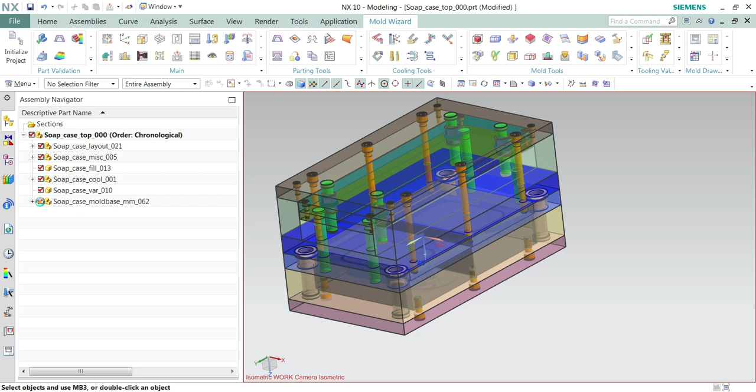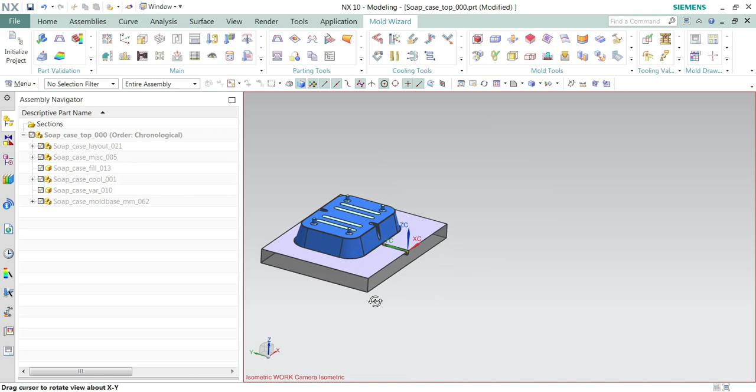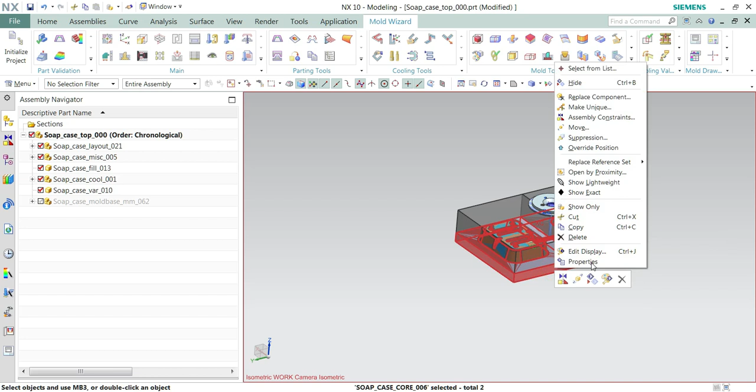We'll start with extracting the runner in the core. I chose a pocket and extracted it with the tool called pocket. So here we made one cavity, one core, and the same will be projected in another core. I'll hide and show - I extracted in a single core, so the same is projected in another core.

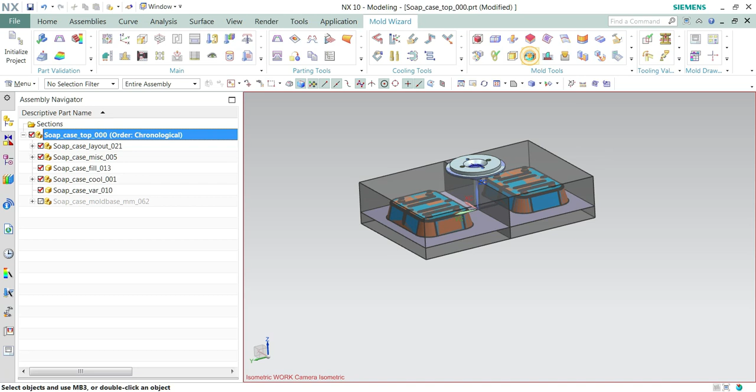The same way for the gate also, gate and runner both are selected, and now I'm going to merge my workpiece to the main core and cavity plate. For this, there is a tool called merge cavities.

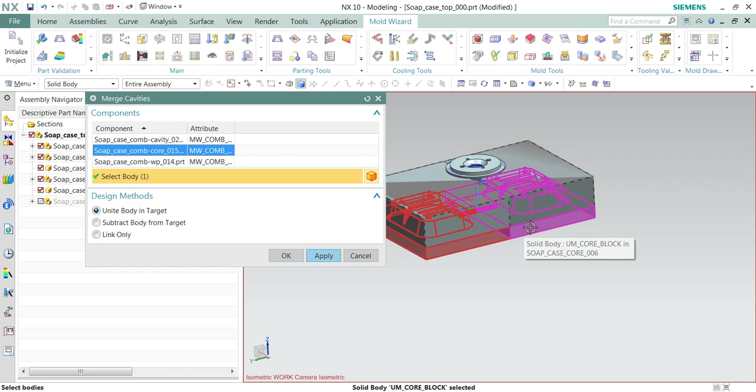There it is shown cavity comb. Comb means merging of both the workpieces - it's a component name called comb. So cavity comb I made by selecting both the workpieces of cavity, and also I'm making a core.

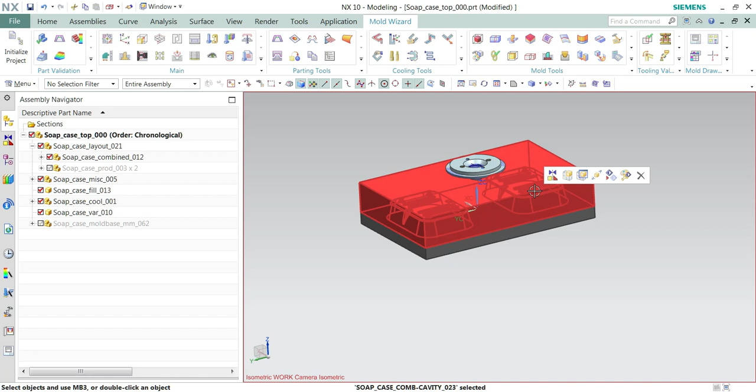Here I'm not making a workpiece, so it won't be selected. This combined component will be there in two assembly files, and the top one will be considered as our final workpiece, while the one below will not be considered, so I'll hide both of them.

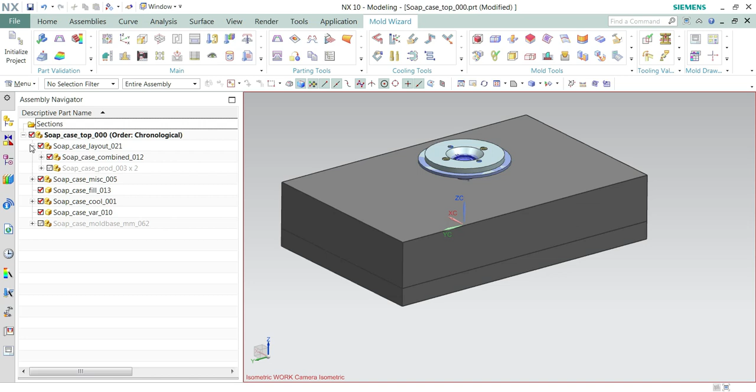For hiding, just select the assembly file and go to the reference set and make it empty, so that it will not be shown in the next process.

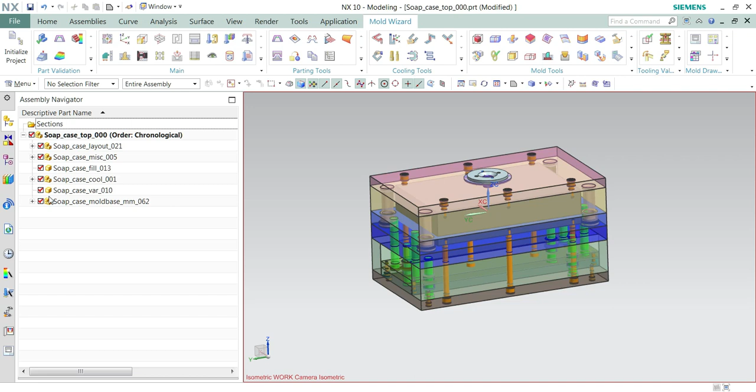Now the important point is merging our cavity and core to the main assembly of the mold. I am going to merge both into one, and for this I will be using the same pocket tool.

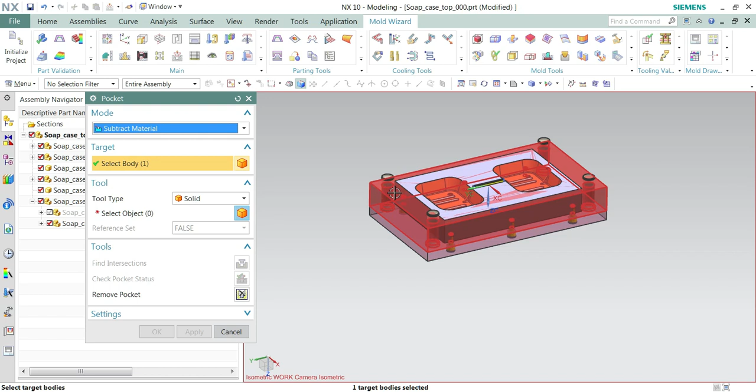Now I will be hiding unwanted plates. In both tools I am going to merge - I'll choose select pocket again. First I will subtract, later I add material to the same, so now I am subtracting.

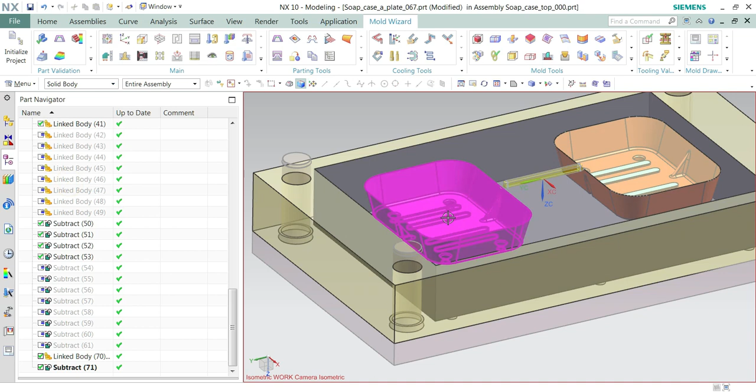After subtracting, the inside pocket will remain, so there will be two bodies remaining. For the two of them, I will manually delete it. I'll filter a solid body, select both bodies and manually delete it.

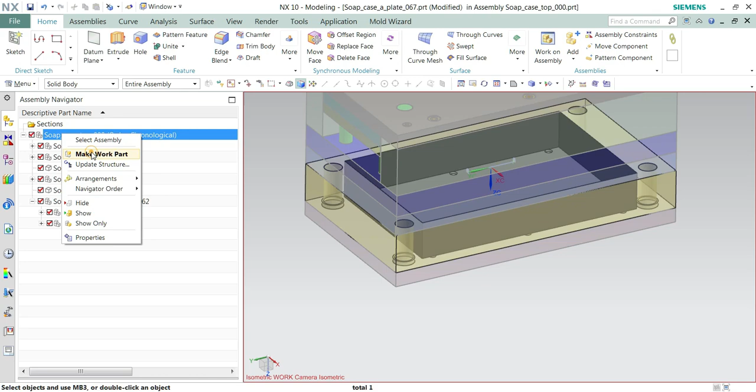This is some residue, and it has to be deleted before merging. Now I'm going for a pocket option to merge both. I'm selecting add material, the same way targeting the plate and tool.

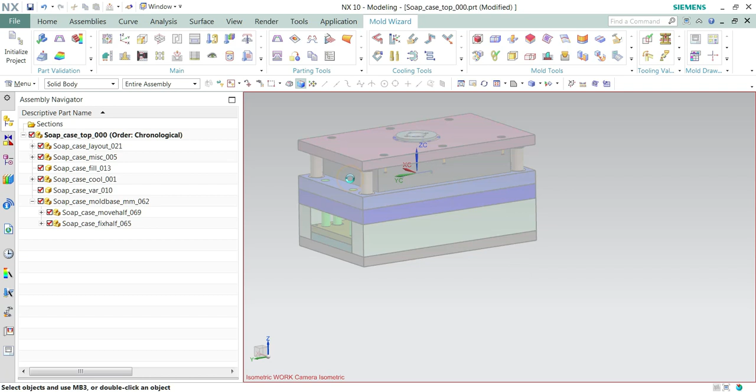As you can see, my cavity has become solid now.

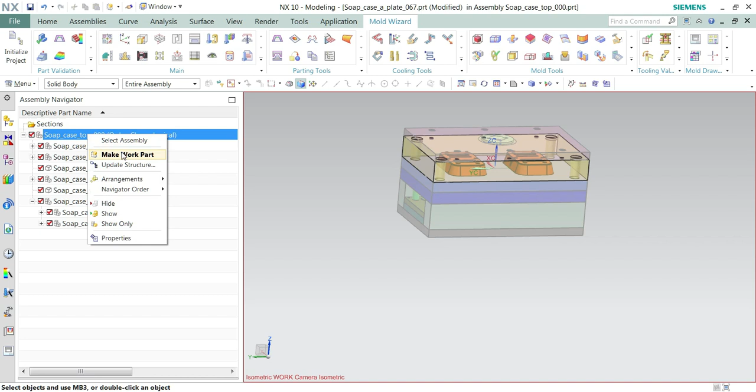For this mold, I'm not using the insert type - I'll be making a solid type whole plate. In an upcoming video, I'll show the insert type too. Since this is a very simple component, I'm not using an insert type here.

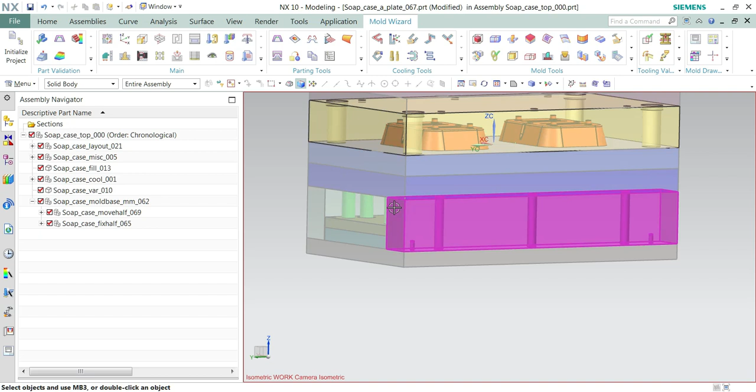The same way you have to do for the core also. I'll make it the work part and show you - hope you can see my cavity becomes solid and my core also becomes solid.

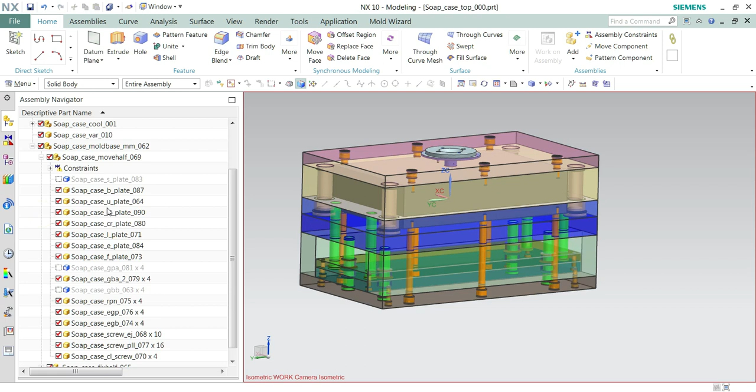So this is a quick video - I'm showing only two of the options. In the upcoming video, next video, I'd like to show making core pins. There is no option in Mold Wizard for making a local insert for core or cavity.

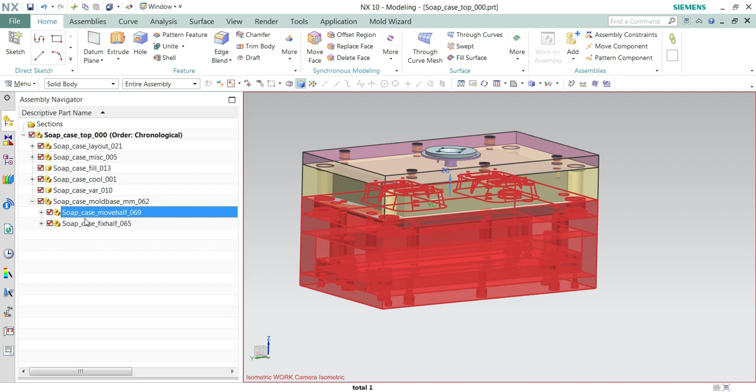So this process is very interesting. I'll show both of them and ensure all unwanted assemblies are set to empty.

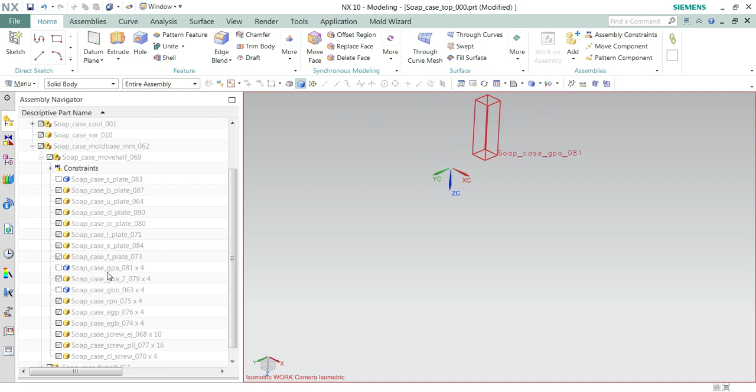Finally we'll check our cavity side, which is merged - here there is no local insert needed. In the core, I think there is a necessity of a local insert as there is a projection of pins. Those I would like to make.

So next video we'll see how to make a local insert of this.